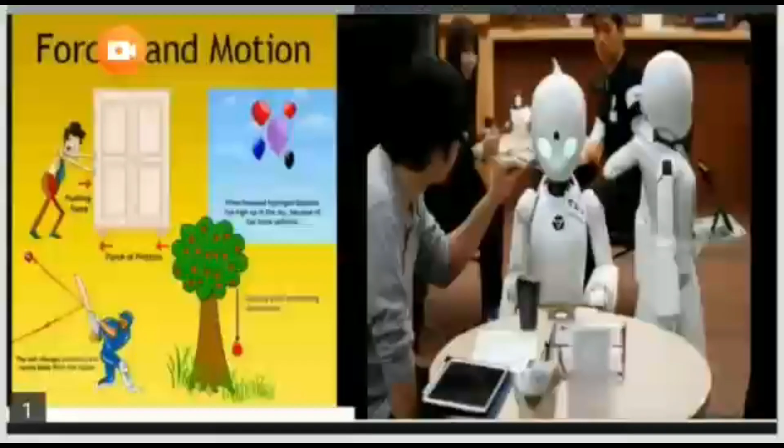Hello children, have you seen this picture? What is this? Yeah, this is a robot.

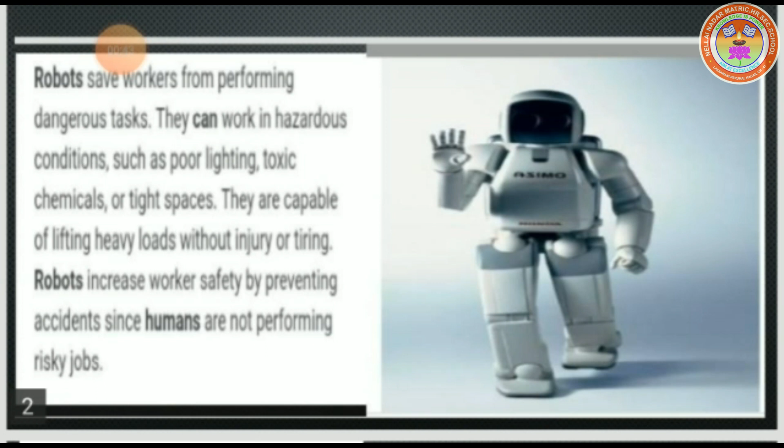Robots save workers from performing dangerous tasks. They can work in hazardous conditions such as poor lighting, toxic chemicals, or tight spaces. They are capable of lifting heavy loads without injury or tiring. Robots increase worker safety by preventing accidents since humans are not performing risky jobs. So robots are very helpful to human beings.

Nowadays, robots also stepped in to help Chinese hospitals cope with coronavirus, checking visitors' temperature, delivering food and medicine, keeping isolated wards clean, and even offering a little entertainment. Medical robots can go where human doctors cannot and process information much faster.

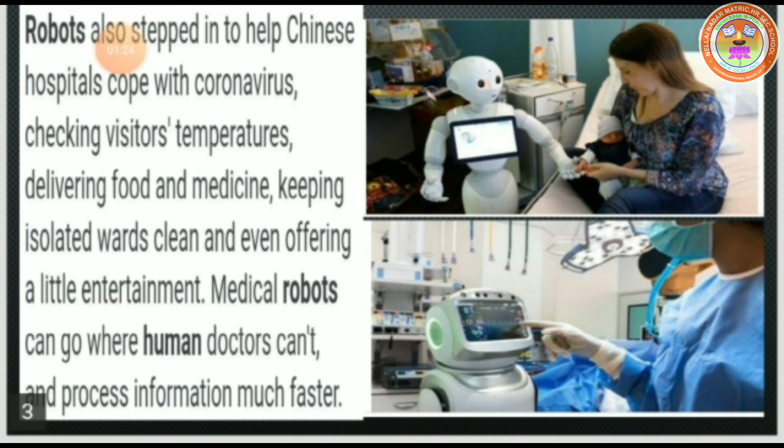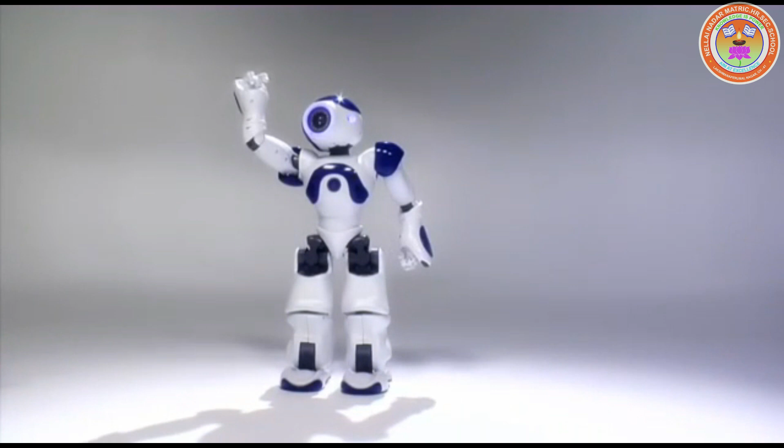Are you eager to see robots? Hello. Hello now.

Wow, what is that thing lying on the ground?

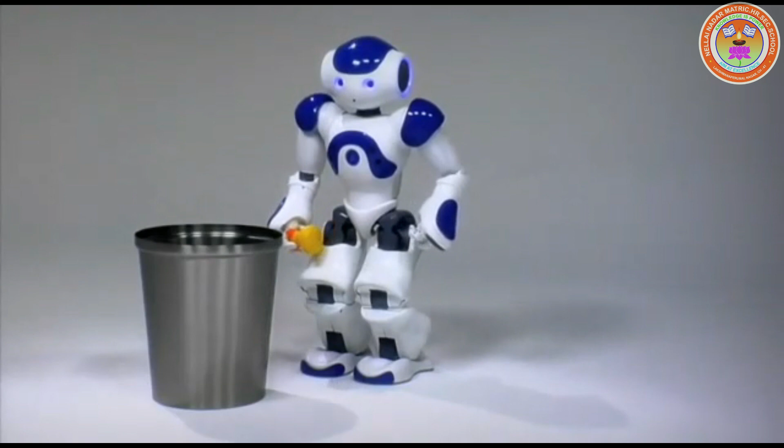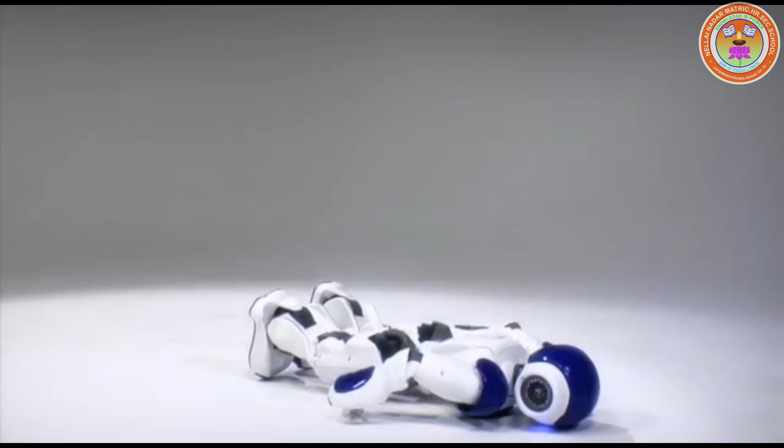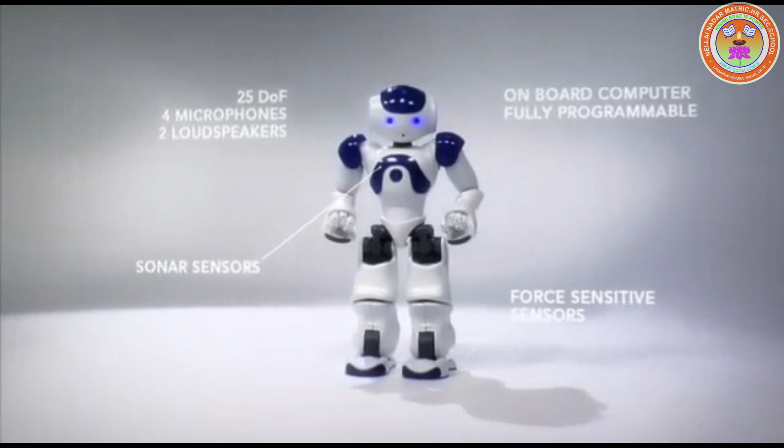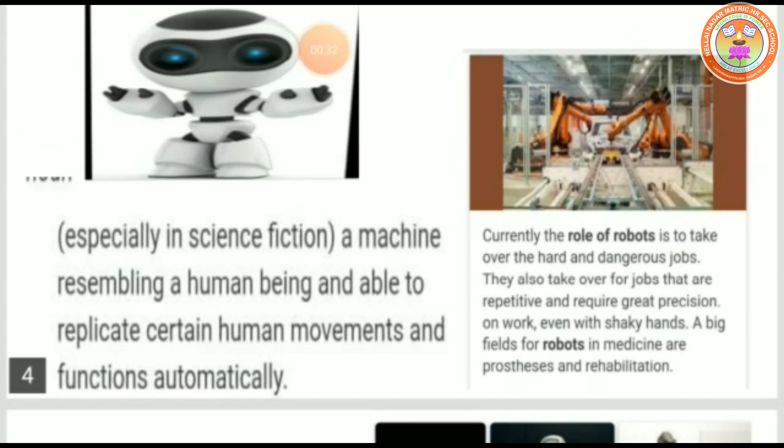Currently, the role of robots is to take over hard and dangerous jobs. They also take over jobs that are repetitive and require great precision, even with shaky hands - a big field for robots in medicine, prosthesis and rehabilitation.

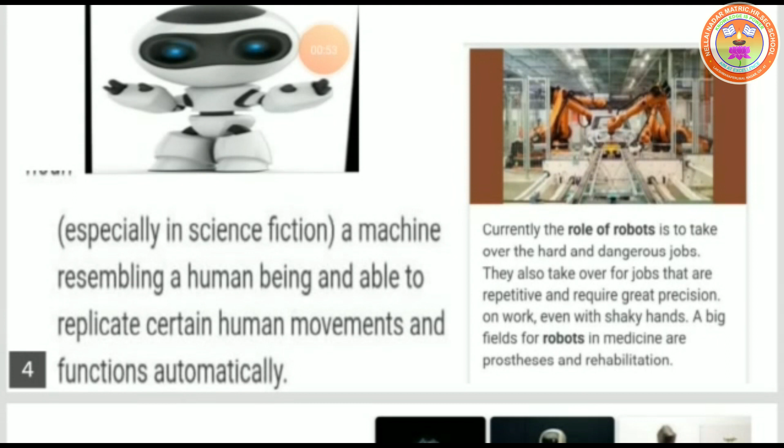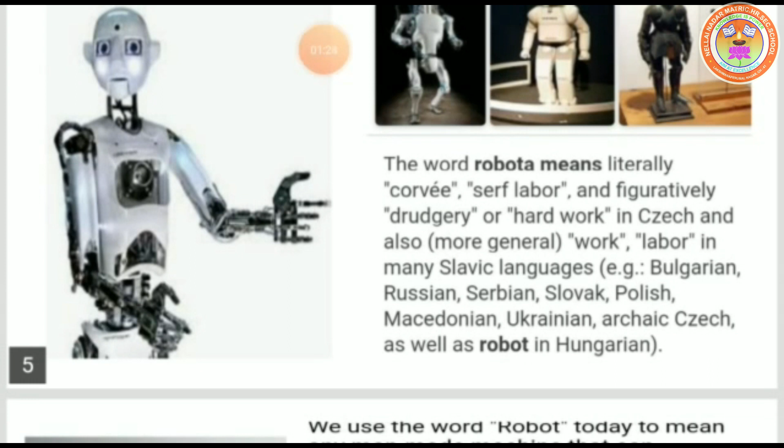The word robota means literally corvee, serf labor, and figuratively drudgery or hard work in Czech, and also means work or labor in many Slavic languages, for example Bulgarian, Russian and Serbian, etc. We use the word robot today to mean any man-made machine that can perform work or other actions normally performed

by humans, either automatically or by remote control. Robotics is the science and study of robots. Science Robotics is the newest journal to join the Science family of journals.

What is a robot made of? For robots, aluminium and steel are the most common metals. Aluminium is a softer metal and is therefore easier to work with, but steel is several times stronger. In any case, because of the inherent strength of metal, robot bodies can be made using sheet, bar, rod, channel

and other shapes. How are robots being used today? Robots are now being used in a customer service capacity in retail stores and hotels around the world. Most of these robots leverage natural language processing abilities to interact with customers in a more human way. Often, the more these systems can interact with humans, the more they learn.

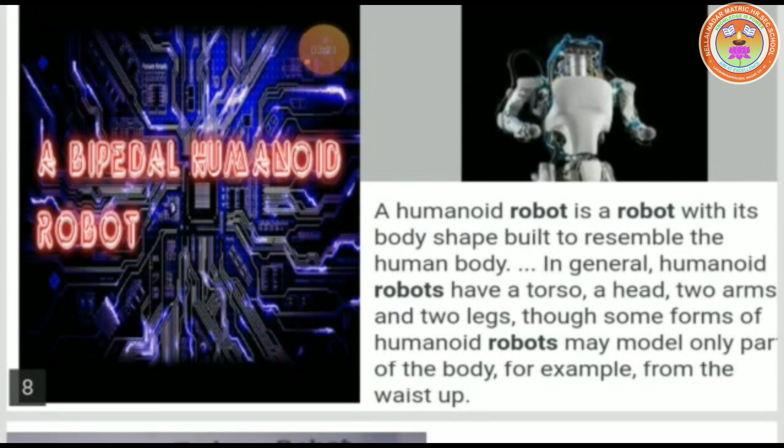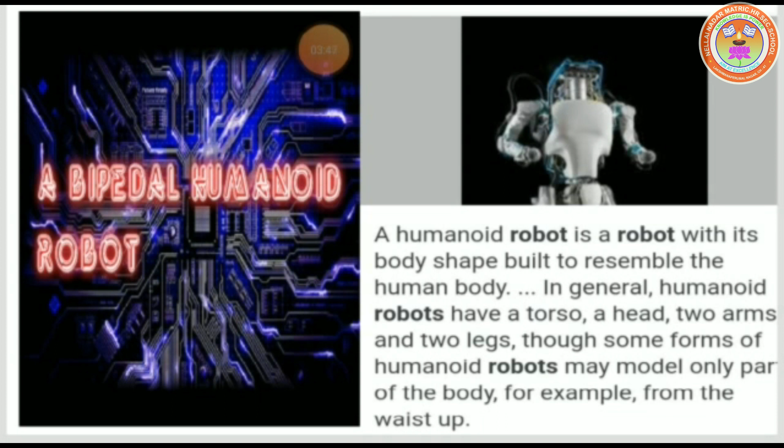We are going to see a bipedal humanoid robot. A humanoid robot is a robot with its body shape built to resemble the human body. In general, humanoid robots have a torso, a head, two arms and two legs, though some forms of humanoid robots may model only part of the body, for example, from the waist up.

Robots are automatic machines. Some robots can perform mechanical and repetitive jobs faster and more accurately than people. Robots can also handle dangerous materials and explore distant planets. The term comes from the Czech word robota, meaning, as already discussed, forced labor.

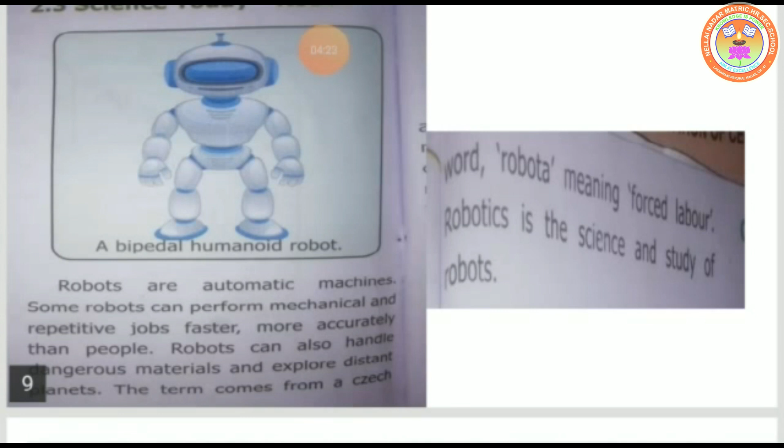Robotics is the science and study of, very good children, robots. Currently, the role of robots is to take over hard and dangerous jobs.

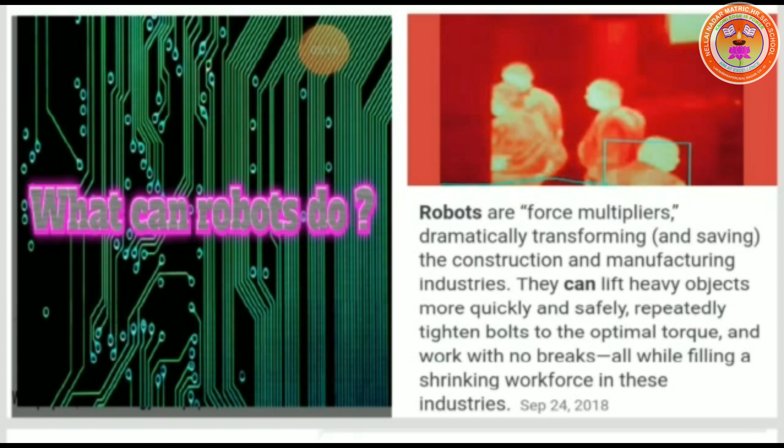What can robots do? Robots are force multipliers, dramatically transforming - that means saving - the construction and manufacturing industries. Robots are very helpful to construction and manufacturing fields. They can lift heavy objects more quickly and safely, repeatedly tighten bolts to the optimal torque, and work with no breaks, all while filling a shrinking workforce in these industries.

Why are robots important? Robots have the potential to positively transform lives and work practices, raise efficiency and safety levels, and provide enhanced levels of service. Without robotics, many of Europe's successful manufacturing industries would not be able to compete from their current European bases of operations. So robots are necessary in the modern world.

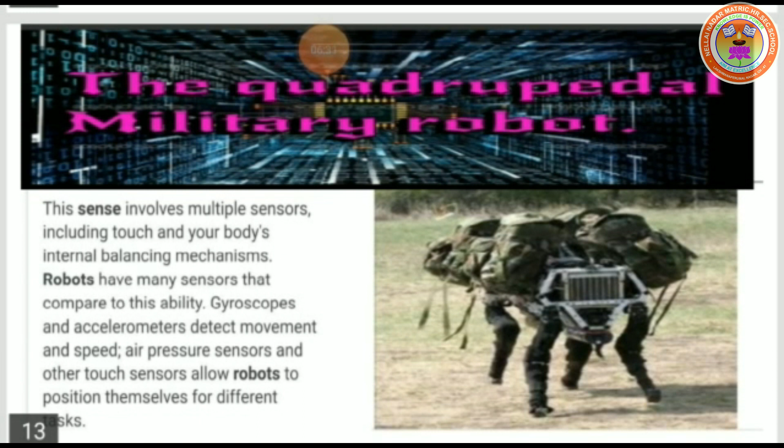Gyroscopes and accelerometers detect movement and speed; air pressure sensors and other touch sensors allow robots to position themselves for different tasks.

Robots can sense and respond to their surroundings. They can handle delicate objects or apply great force, for example to perform eye operations guided by a human surgeon, or to assemble a car. With artificial intelligence, robots will also be able to make decisions for themselves like human beings.

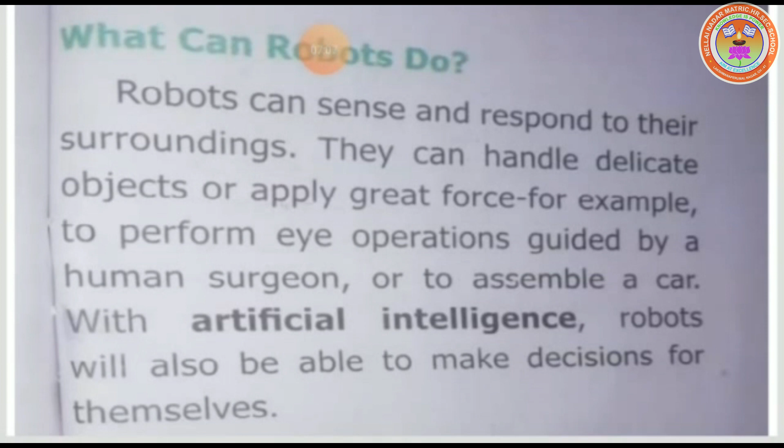Robotics and artificial intelligence is a general term that implies the use of computers to model and/or replicate intelligent behavior. Research in AI focuses on the development and analysis of algorithms that learn and/or perform intelligent behavior with minimal human intervention.

Artificial intelligence attempts to create computer programs that think like human brains. Current research has not achieved this, but some computers can be programmed to recognize faces in a crowd.

Robots in manufacturing help to create jobs by reshoring more manufacturing work. Robots protect workers from repetitive, mundane and dangerous tasks, while also creating more desirable jobs such as engineering, programming, management and equipment maintenance.

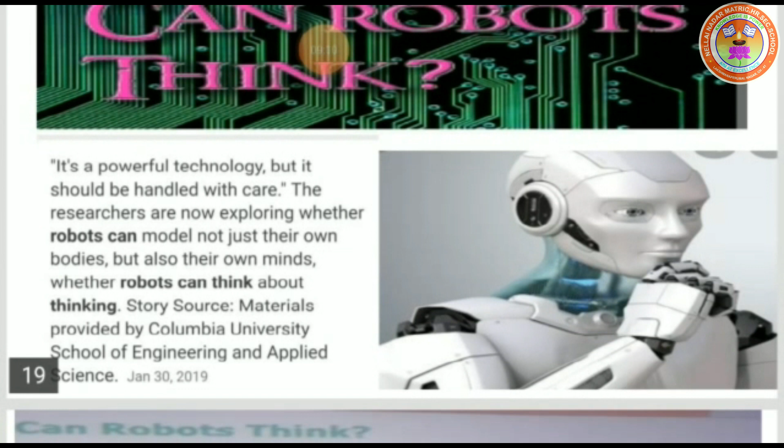Can robots think? Articulated welding robots, industrial robots, can think. They can play complex games such as chess better than human beings. But will a robot ever know that it is thinking?

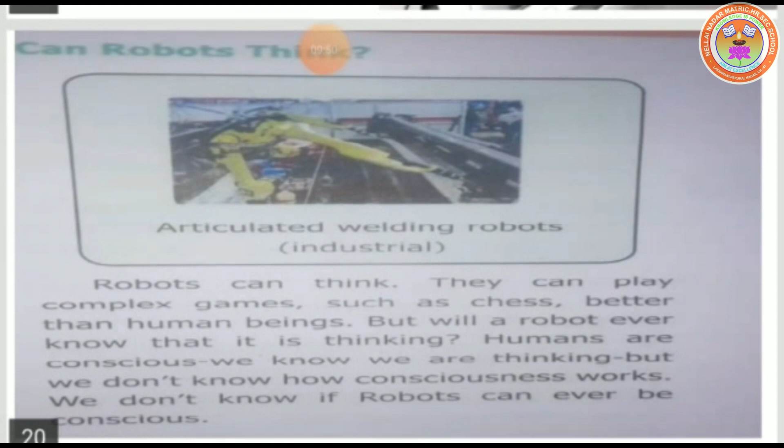Humans are conscious. We know we are thinking, but we don't know how consciousness works. We don't know if robots can ever be conscious.

Nanorobotics. Nanorobots, or nanobots, are robots scaled down to microscopic size in order to put them into very small spaces to perform a function. Future nanorobots could be placed in the bloodstream to perform surgical procedures that are too delicate or too difficult for standard surgery.

Imagine if a nanobot could target cancer cells and destroy them without touching healthy cells nearby. So robots are very helpful to the medicine field also.

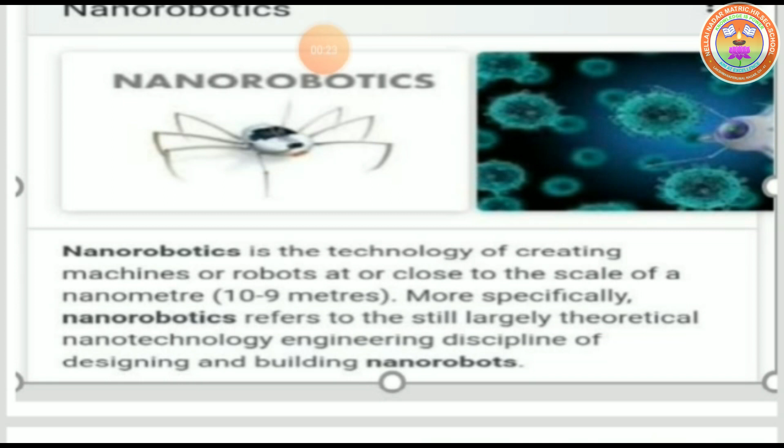Nanorobotics is the technology of creating machines or robots at or close to the scale of a nanometer, 10 to the power of minus 9 meters. More specifically, nanorobotics refers to the still largely theoretical nanotechnology engineering discipline of designing and building nanorobots.

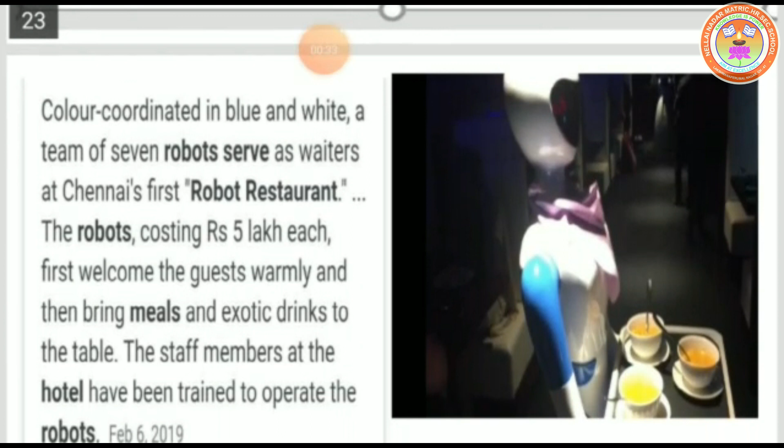Color coordinated in blue and white, a team of 7 robots serves as waiters at Chennai's first robot restaurant. The robots, costing rupees 5 lakh each, first welcome the guest warmly and then bring meals and exotic drinks to the table. The staff members at the hotel have been trained to operate the robots.

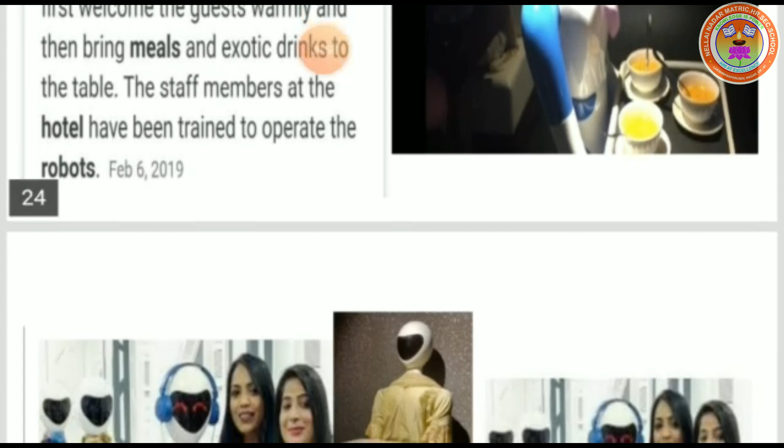Robots in the educational field help students develop teamwork and cooperative skills. When kids work on a robotic project, they need to work in a group or team, as one may be good in programming skill, but other parameters such as engineering, technology and sensors are also important for building a robot.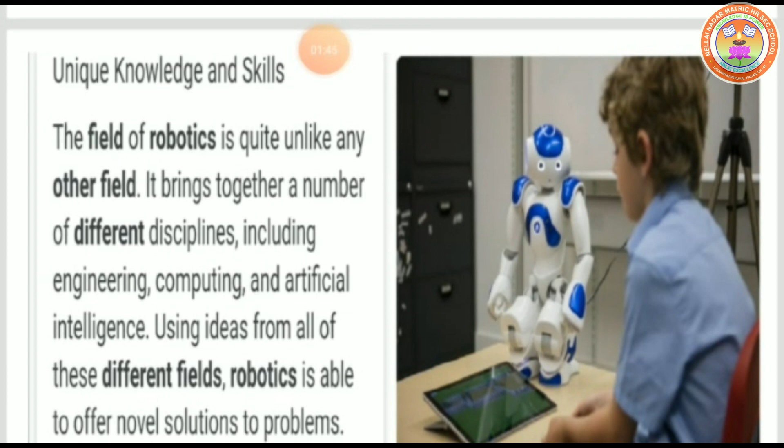Unique knowledge and skills: the field of robotics is quite unlike any other field. It brings together a number of different disciplines including engineering, computing and artificial intelligence. Using ideas from all of these different fields, robotics is able to offer novel solutions to problems.

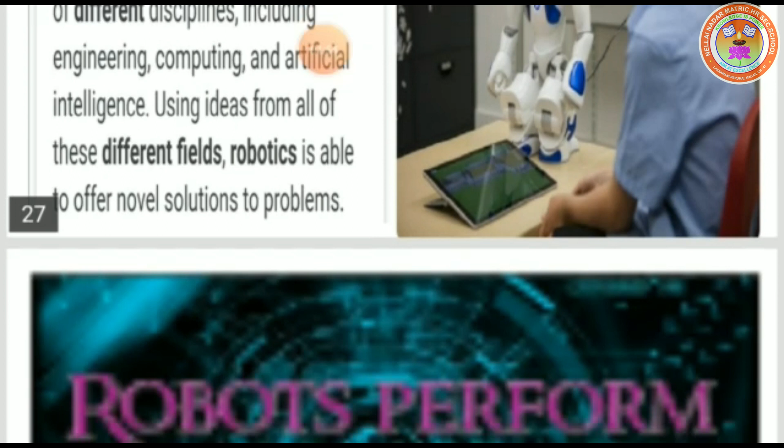Robots perform surgeries. Robotic surgery, or robot-assisted surgery, allows doctors to perform many types of complex procedures with more precision, flexibility and control than is possible with conventional techniques. Robotic surgery is usually associated with minimally invasive surgery procedures performed through tiny incisions.

Robots in medicine help by relieving medical personnel from routine tasks, freeing their time for more pressing responsibilities, and by making medical procedures safer and less costly for patients. They can also perform accurate surgery in tiny places and transport dangerous substances.